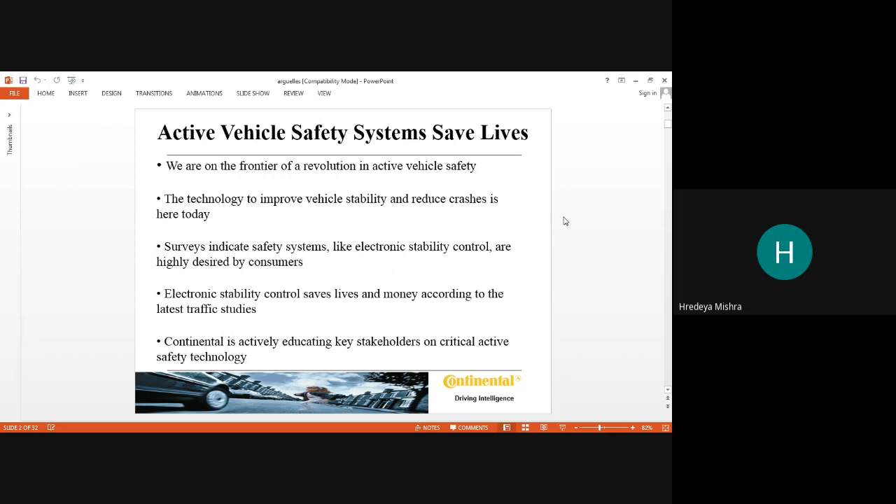Engineers face the challenge to make safer SUVs, because compared to a normal car, the accidental case is more in the SUV. These are paper cuttings showing car safety experts pushing for new devices. Sport-utility safety is a federal hearing topic.

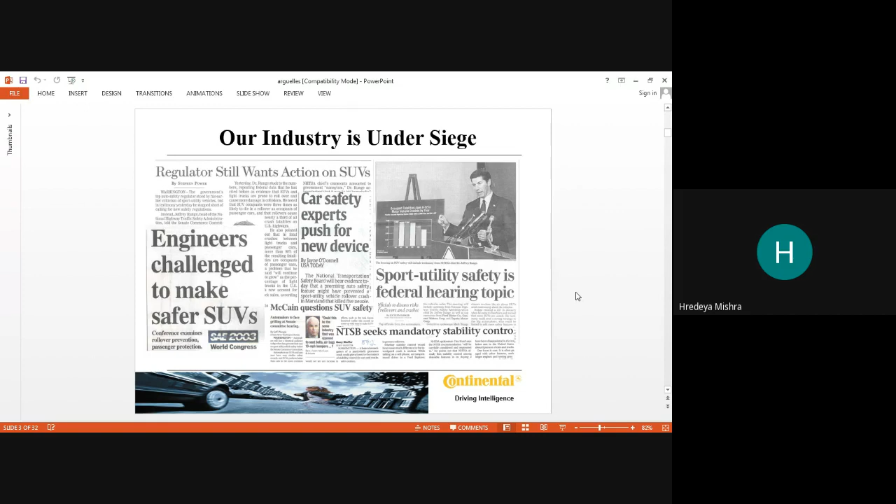These paper cuttings show why vehicle safety is necessary. The crash cost in America is 230 billion dollars - the accidental cases where the vehicle is crushed. This is 230 billion in one year, only for 2002. Think about how much this amount is.

Nearly 3 million injuries and 42,815 fatalities, and 2,53,000 passenger vehicle rollovers. Injuries declined but fatalities increased - the highest number of fatalities since 1990. Rollovers accounted for 82% of the increase in fatalities.

95% of all cases are due, at least in part, to driver error. So 95% of accidents happen only due to driver errors - meaning if there is some mistake by the driver, an accident will occur. So we can say the driver is much more responsible for accidents. If another passenger makes a mistake, that doesn't have much effect, but if the driver makes a mistake, there are more chances for an accident.

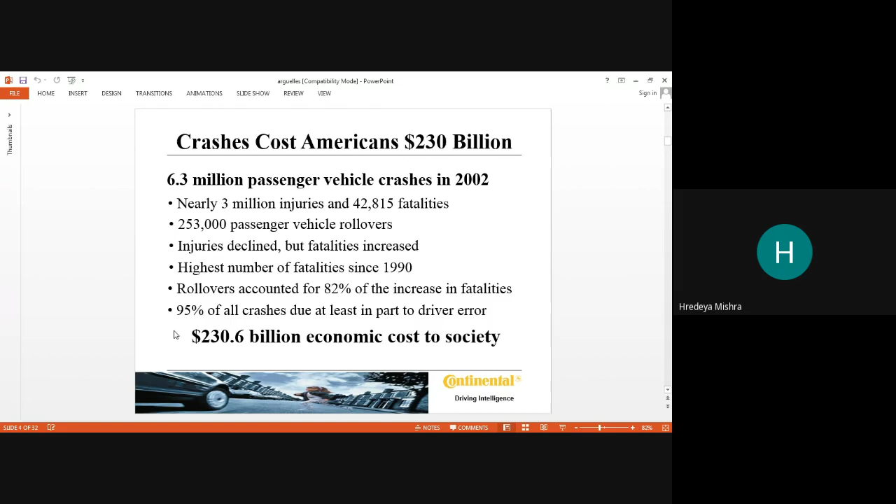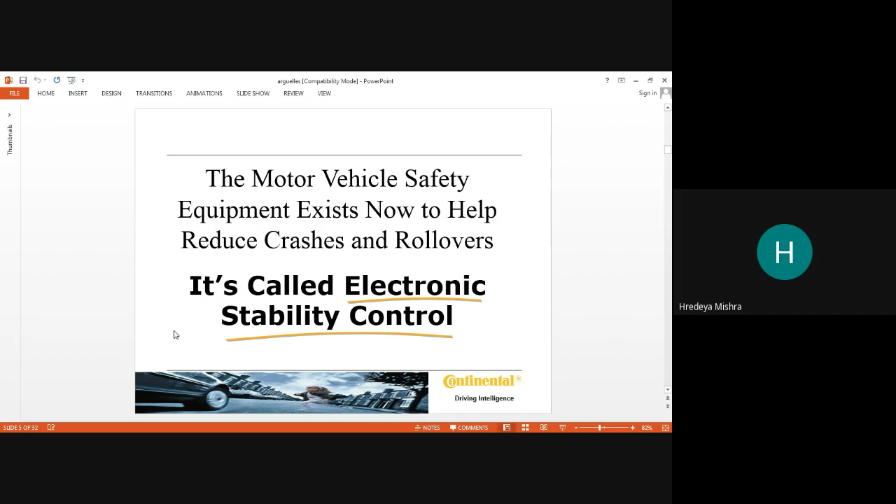The motor vehicle safety equipment that exists now to help reduce crashes and rollovers is called Electronic Stability Control, ESC. This provides safety - when there's a straight accident, and rollover means your vehicle rolls over on the road. Better stability condition comes from electronic stability control.

Technology is our passion, but safety is our business. What is the meaning of this proverb? Safety is our business - but here 'business' doesn't mean business in the commercial sense. It means priority - it is our duty to save the human, and to be passionate about the technology and the new technologies coming in the automobile sector.

We have to know the scope and the advantages and disadvantages as this technology comes, and so many technologies are added in the car. The car is like our next home, our second home - all things are included. We can watch a movie, we can watch cricket in the car, we can also sleep in the car, we have meetings in the car. So many things are attached in the car - we can say the car is our second home.

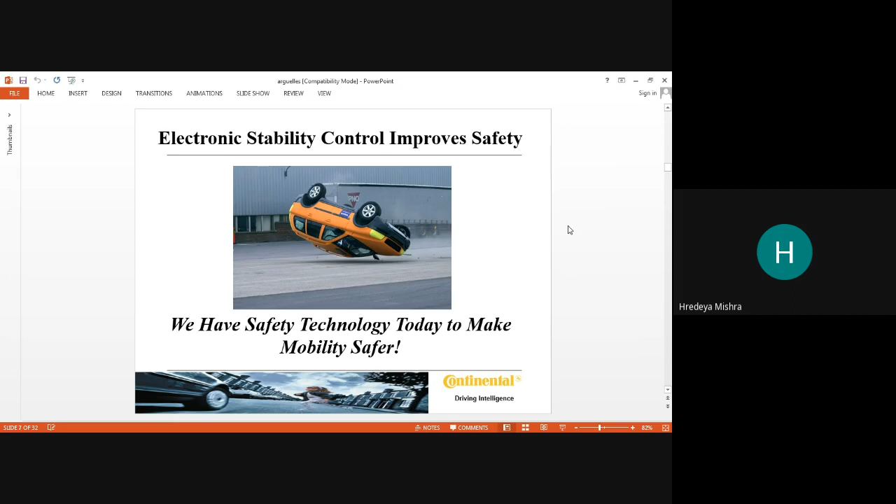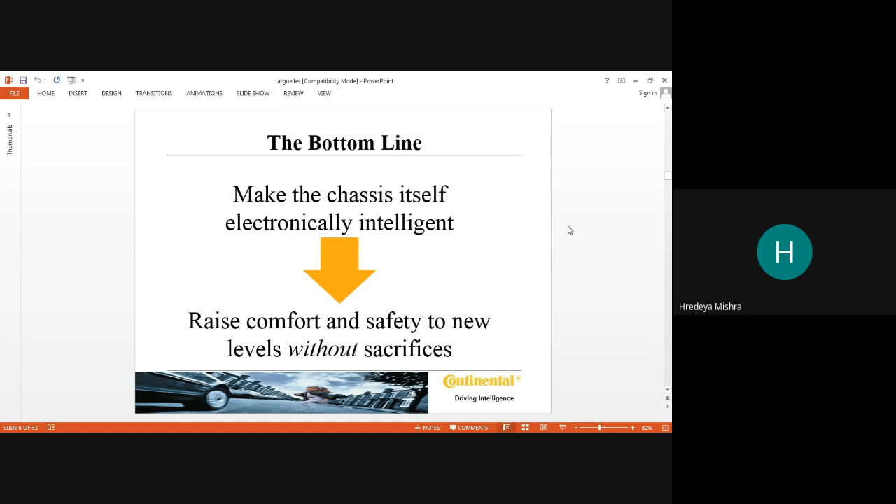So we can say this technology makes the chassis itself electronically intelligent, raising comfort and safety to new levels without sacrifices - meaning they have fitted intelligence onto the chassis too.

Passive safety is job three.

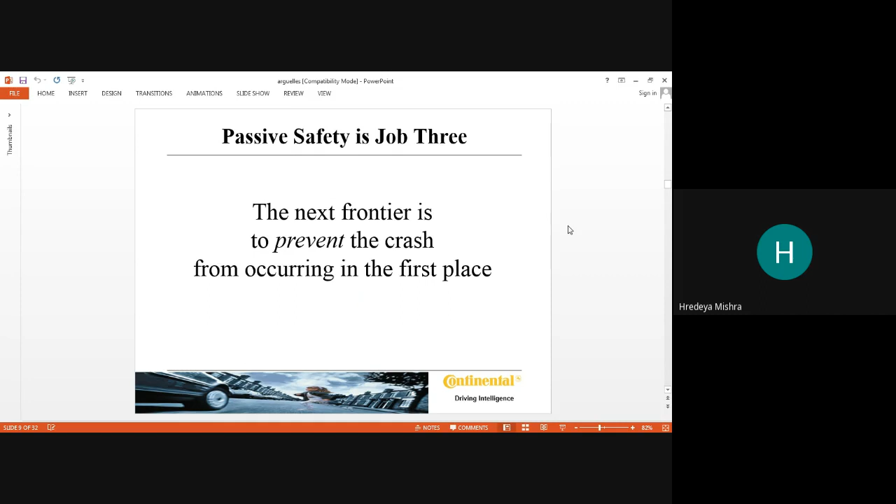Okay, the next frontier is preventing crashes from occurring in the first place. The key is to prevent crashes from occurring from the front. This is active safety, meaning this is safety we can see.

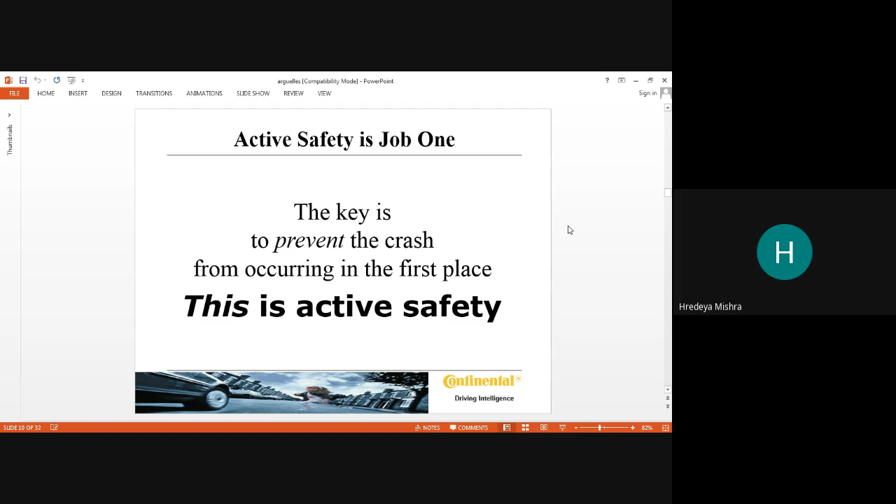What are the safety equipments installed in the cars and how can we use them? Now, opportunity in smart safety system. The key is to prevent crashes from occurring in the first place.

From the first place, avoid the problem situation. This is the first phase. How do we avoid the problem situation? Before starting our journey, or when we want to plan something about where we want to go, first plan your vehicle. Is your vehicle ready for that? Precautionally, you check all the safety measurements of this vehicle, to see which are working properly or not.

So we need to avoid the problem situation. Check the maximum possible things - braking system working properly or not, all safety equipment installed in the car or not, air pressure in the tires, and all the things we have to check when we prepare for a long journey trip by car. This is avoidance of the problem situation. We have to avoid them.

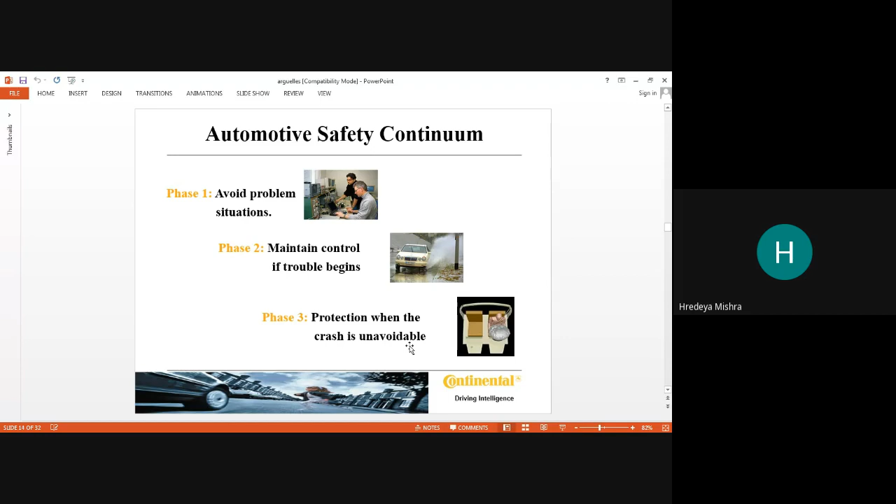Third, protection when the crash is unavoidable. Your safety device is already installed, you already checked it, then what happens? Protection when the crash is unavoidable means, even though we see all the safety measures, unfortunately an accident happens. Then what happens? Then your safety occurs and you're safe in life. Okay, so what happened? Like our present situation.

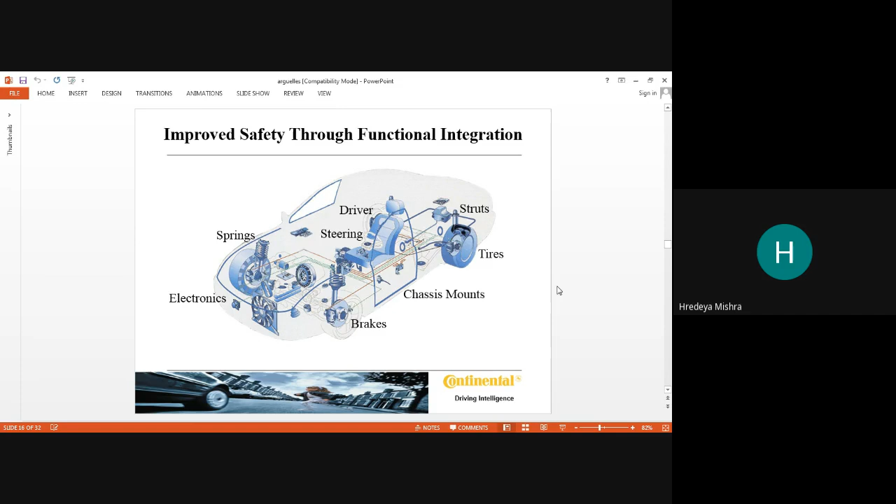So networking active and passive technology will be improved. Accident preventing system, global chassis control, stability management system, electronic stability program, roll stability control, electronic stability program second, electronic braking system, anti-lock braking system - that is called ABS, traction control system, brake assist, hydraulic brake system, brake caliper, brake booster, etc.

Active safety system - accident prevention. We always avoid the accident. This means our precautions, our technology, is to avoid or prevent the accident.

Now, what is our goal? A vehicle that prevents accidents and injuries. A vehicle that prevents accidents and injuries. So, injury preventing system, intelligent restraints, electronic restraints, passive safety.

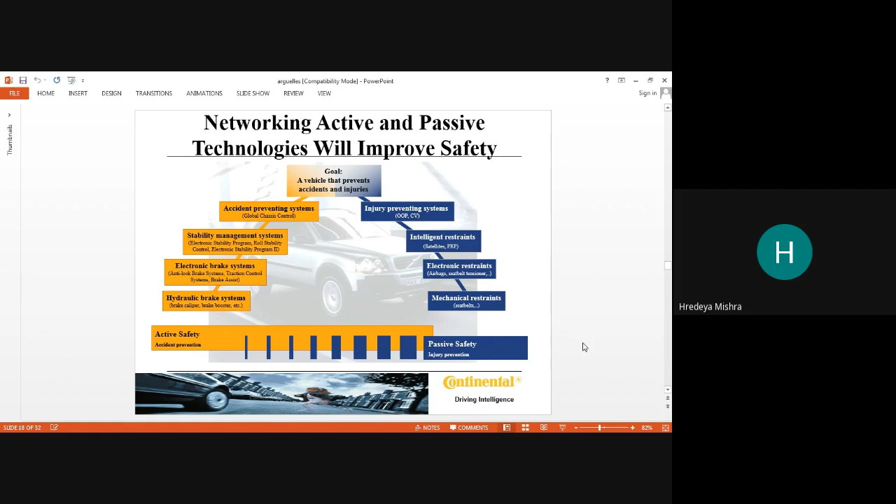So these are active safety, and these are passive safety. Active safety avoids the accident and passive safety prevents injuries. Active safety avoids the accident and passive safety provides resistance to injuries, meaning no injuries - that is our passive safety.

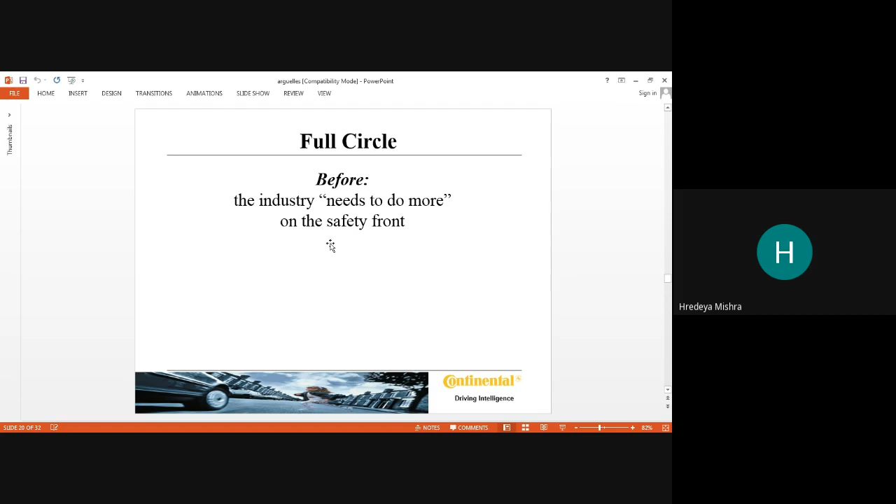Now we need to do more to make our technology better understood and sought after in the new vehicle marketplace. So this was before, but this is now what we need - this is what we need.

Now, those who have a bike or a car - about 10-15% become mechanics themselves, meaning if any small problem occurs, they can solve it themselves. So whatever things we use, we need medium information, not just basic information. We need to do more to make technology better understood - we have to understand what technology we can use.